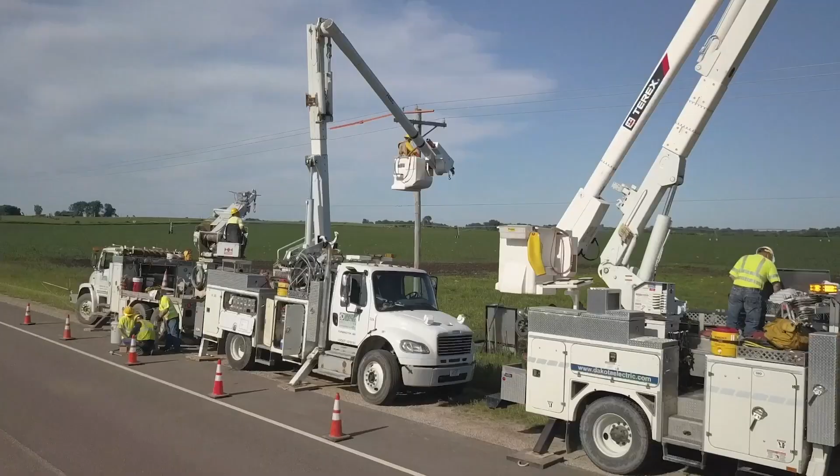Allison Transmission engineers and manufactures propulsion solutions for a wide variety of both on- and off-highway vocations. To better help our customers, OEMs, and Allison-authorized distributors and dealers understand which Allison products best fit their needs, we compiled relevant data and information into one place, our Vocational Model Guide, or VMG.

Recently released, the newest edition of our VMG includes product overviews, quick references, and in-depth technical details that provide a comprehensive look at all Allison transmission vehicle propulsion capabilities. In this video, we will review how you can utilize the VMG to assist speccing and selecting the right Allison product to meet your customers' needs.

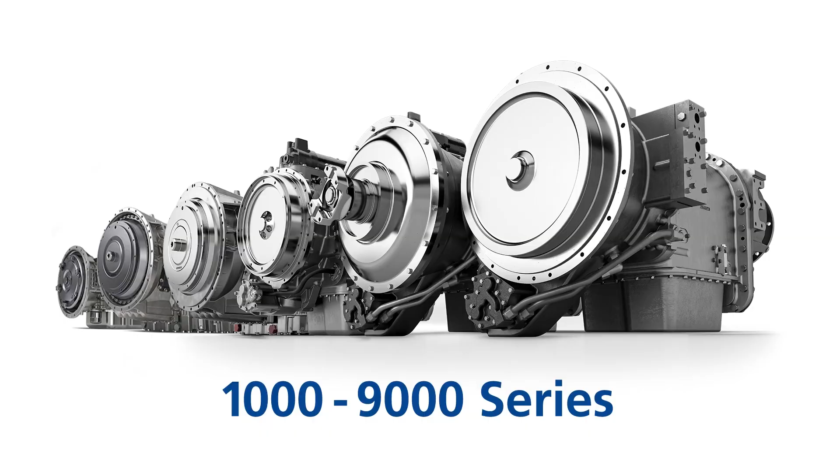In the guide, you can access all 1000 to 9000 series specifications, gear ratios, PTO information, engine speeds, ratings, retarder options, physical descriptions, features and advantages, input-output functions offered, as well as fluid and filter change recommendations. To find specific information you're looking for, simply locate it in the table of contents and then jump to that page.

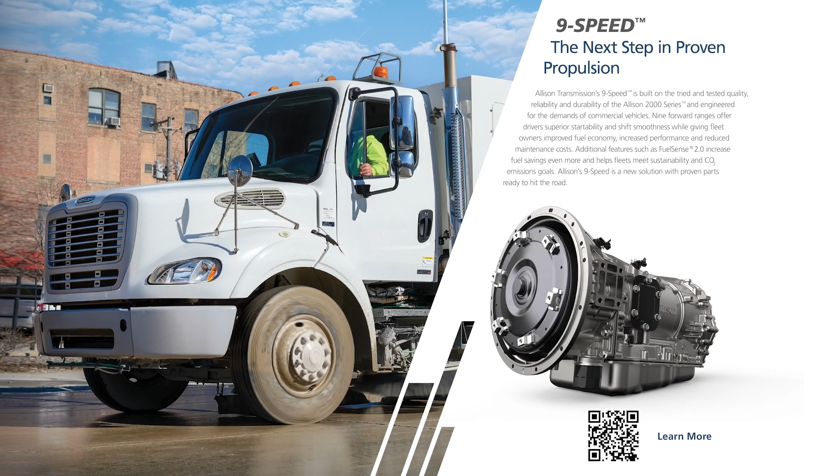Some exciting new features of this year's VMG are the featured product pages for some of our newest propulsion solutions, including the 9-speed, FracTran, TerraTran, eGen Power e-axles, and eGen Force electric hybrid. Each page includes a QR code to link directly to the product's landing page to access the most up-to-date information to share with your customers.

Let's discuss the VMG's layout to help you better understand how to navigate and find the information you need. At the beginning of the VMG, you will find the new featured products pages, followed by specs for our 1000 to 4000 series models and vocations.

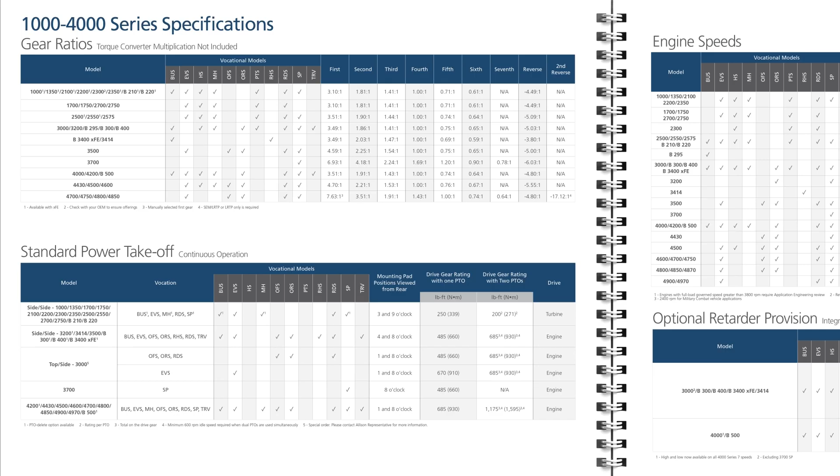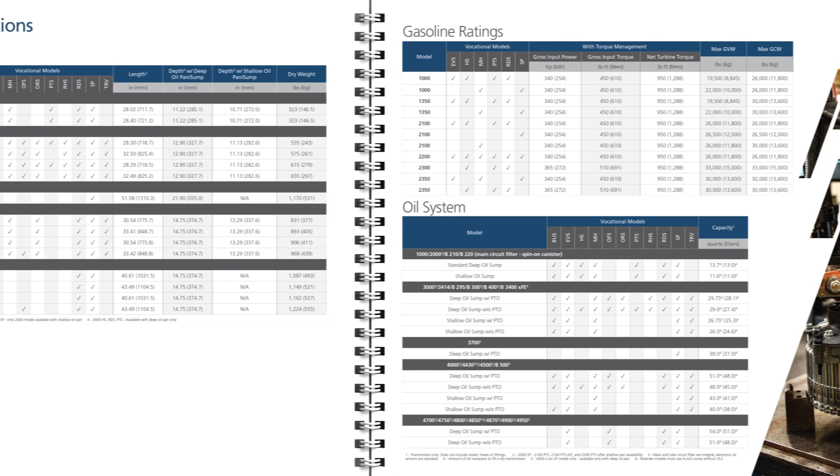These specs include gear ratios, power takeoff information, engine speeds, torque converter information, optional retarder provisions, physical descriptions, and oil system specifications. Following that, you will find the same specs for our 5000 to 9000 series models.

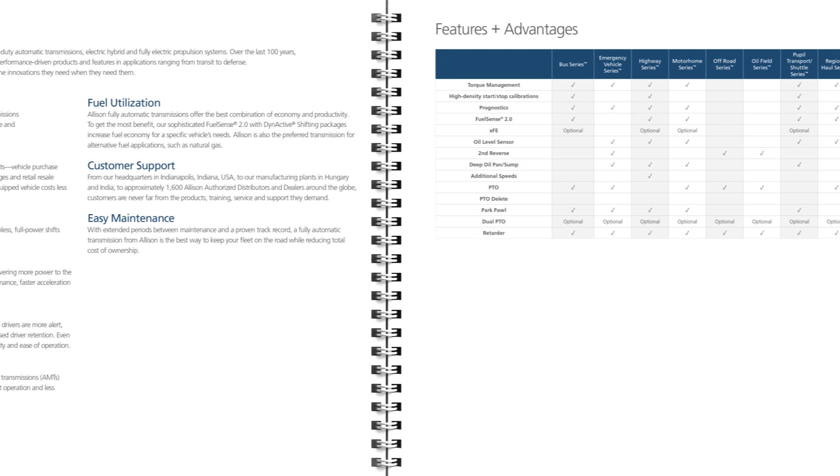Next, you will find key features and advantages available in our different series that set us apart as an industry leader and make our propulsion solutions the best on the market.

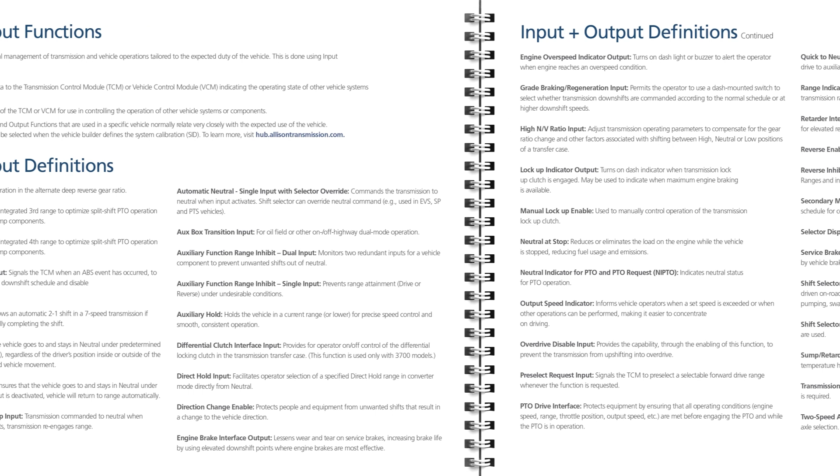The guide then also includes information on our input and output functions, or I/O functions. Here, you will find an overview of the Transmission Control Module, or TCM, and the role the I/O functions play in that system, as well as a list of definitions, such as automatic neutral, PTO drive interface, secondary mode, and more.

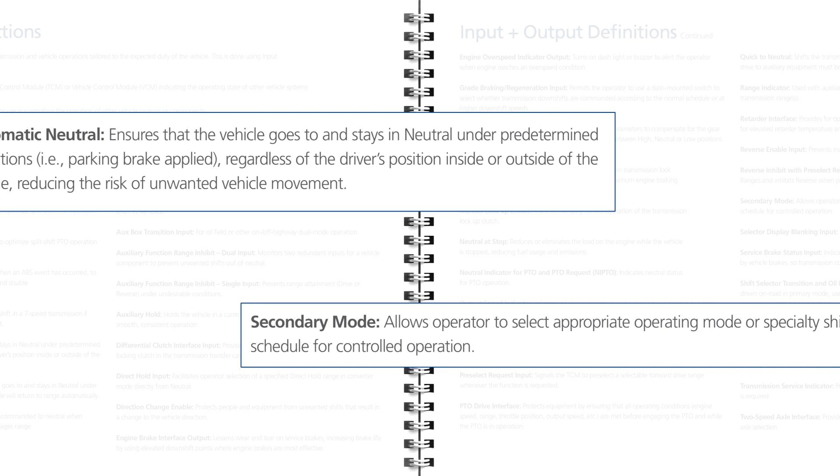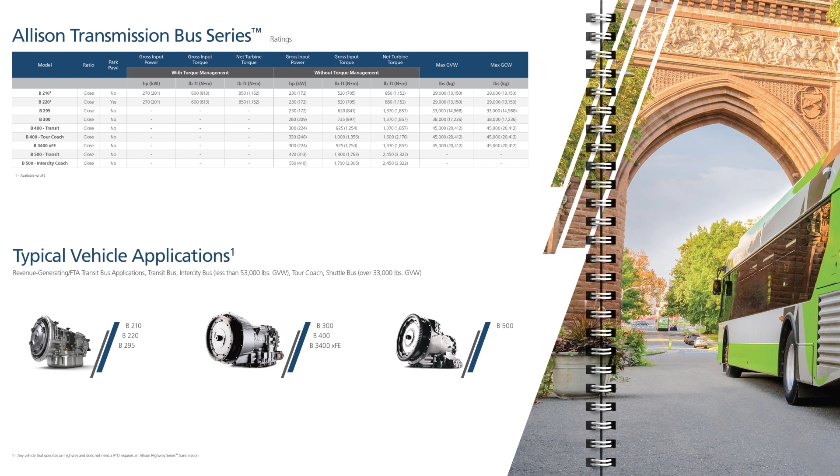The next section of the VMG is for series specifications. This is where you will find every detail you need to spec the right transmission for specific vehicle vocations. For each series, we've included specific ratings, application types, I/O functions, and more.

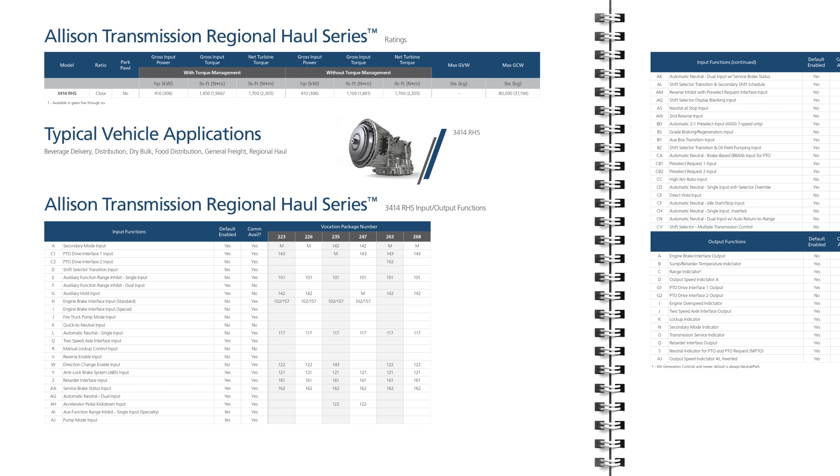For example, let's look at our Regional Haul series. Here you can view available ratings for our 3414 RHS, including gear ratio, park pawl, gross input power, gross input torque, net turbine torque, with and without torque management, and max gross vehicle weight and gross combined weight.

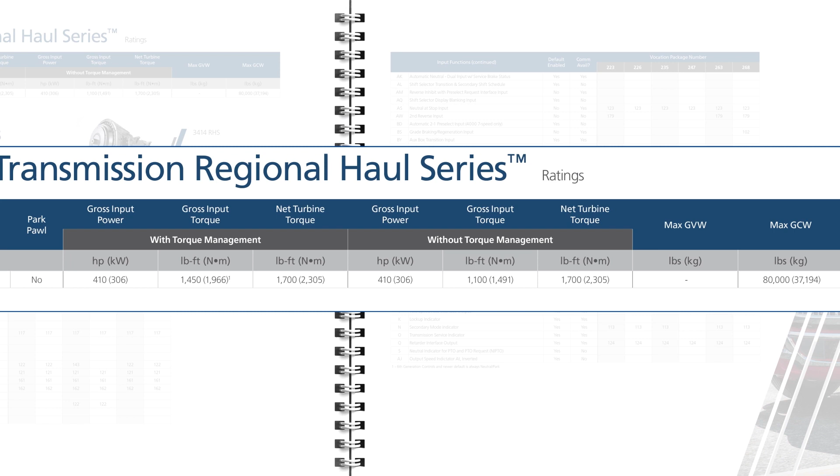In the series specification section, you can also view a wide range of typical vehicle applications.

After the series sections, you will find an overview of the Allison Hub, our online centralized location for all Allison technical information. In the VMG, we provide you with details on how to register for the Hub to take advantage of the many features it offers, including Hub Premium.

With Hub Premium, you will have access to the latest updates and revisions to our printed manuals in online and offline formats.

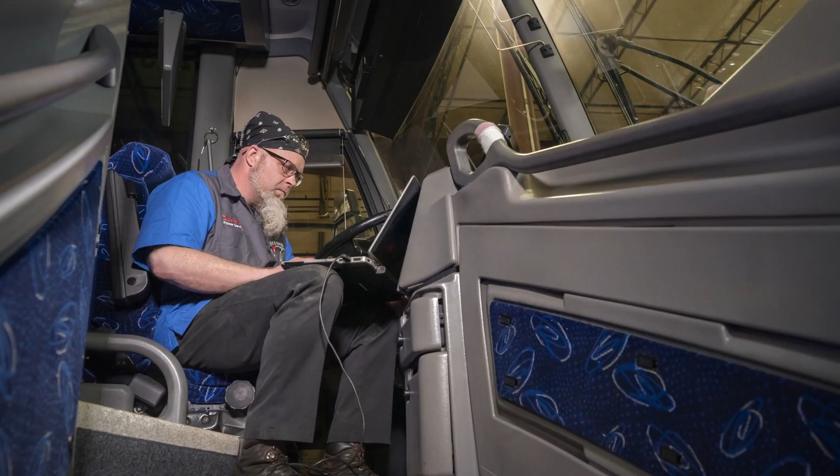You can also learn more about Allison Diagnostic Optimized Connection, or DOC. This is a diagnostic tool that allows users to troubleshoot and service Allison electronically controlled commercial transmissions and transmission control systems. We also included an overview of Allison's FuelSense 2.0 advantages.

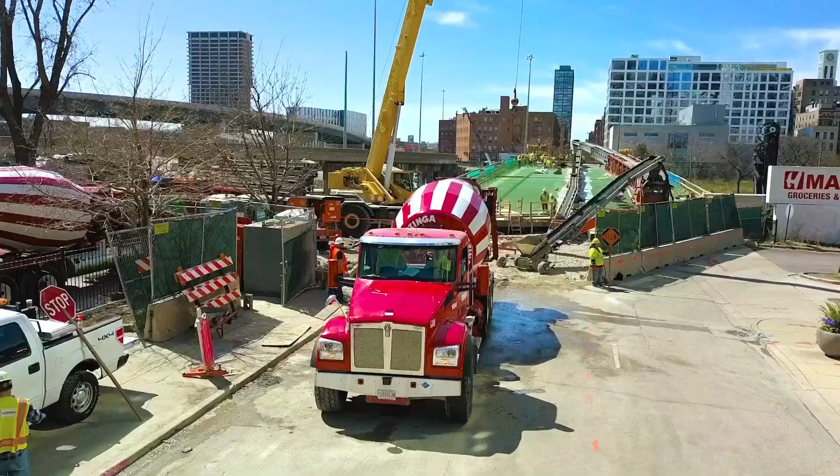Here you will find an overview of the benefits and advantages FuelSense 2.0 can provide for your customers. Dynactive shifting, acceleration rate management, and neutral at stop give your customers' fleets the perfect balance of performance and fuel economy.

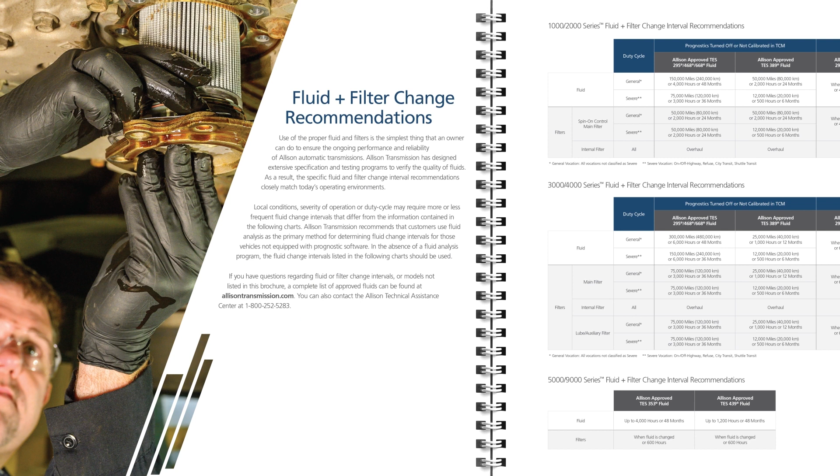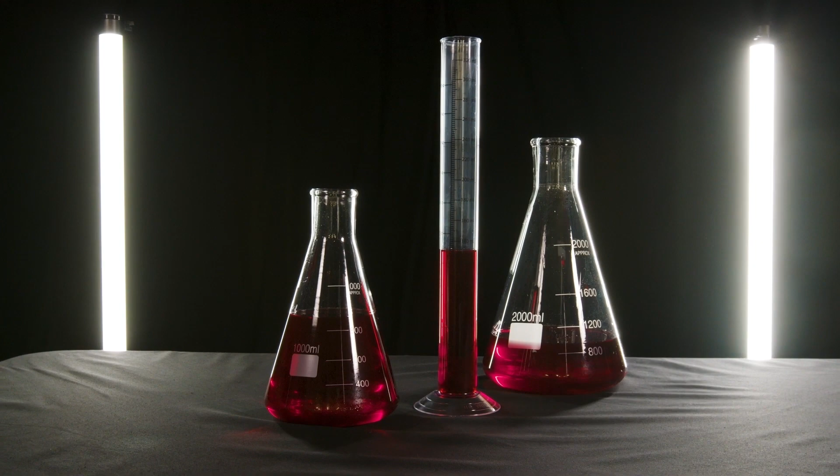Next, you will also see fluid and filter change recommendations, including information regarding TES 668, our newest high-performance transmission fluid that provides 1000 to 4000 series with superior shift quality and reduced noise and vibration.

Finally, you will find a reminder of the Allison Promise, which is to provide the most reliable and valued propulsion solutions in the world to enable our customers to work more efficiently.

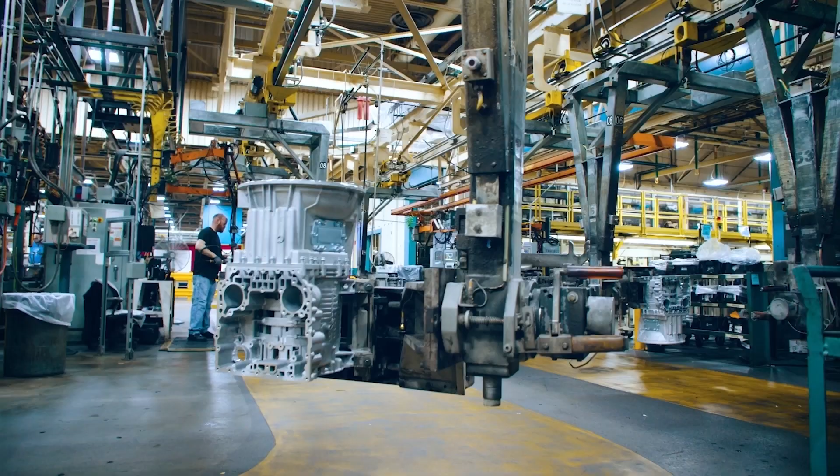The Allison Transmission Vocational Model Guide is your one-stop shop to find all the information you need to determine the right Allison propulsion solution for all your customers' needs.